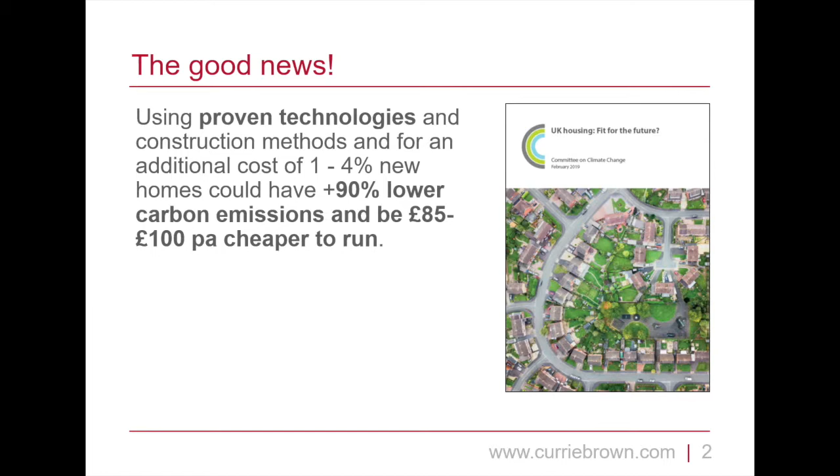Of course, there's always a but, and in this case, the but relates to the fact that although these are all proven technologies, and there are probably half a dozen examples of all of them in this room today, if we're talking about building 300,000 homes a year, which is the ambition by the mid-2020s, and changing the technologies we use to heat those homes across the board, and the way in which they're built, the sorts of technologies and methods we use for construction—although they're established, they're not mainstream.

So that transition, managing it so it's done without causing too many risks to the performance of homes, too much disruption to the industry, is a key challenge.

We did some analysis on the impact of delaying action and what happens if you were to build to current standards and then try and retrofit to higher standards in the future. What that showed us was that the costs were 7+ times higher if you try and achieve the same standards via retrofit. So new build is your big opportunity, and we really don't want to miss that opportunity.

And also, the carbon penalty that you pay is really quite substantial, and I'll come on to the analysis around that. So every year that you delay retrofitting to these higher standards, you're incurring quite a big carbon penalty, which is significant even over the 60-year life of that home.

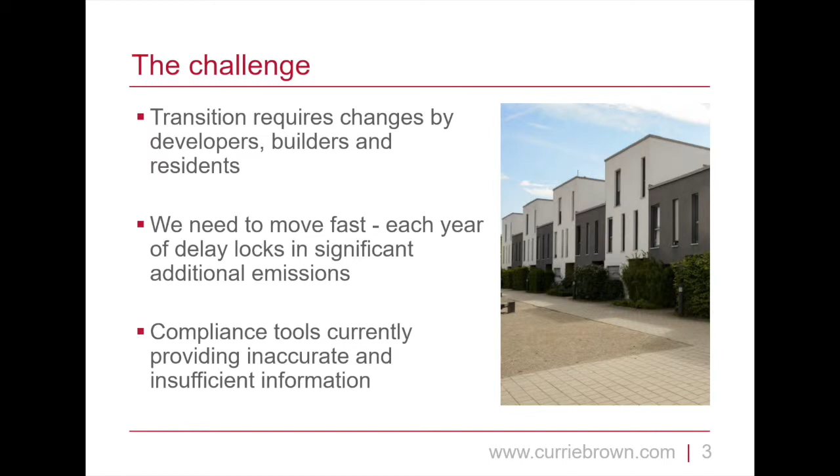I won't go too much into these points in great detail because they're things Lynn's already covered. The key thing is there's a recognition that the ambition needs to change. We've had the same building standards now for 6 years, and given the scale of expectation, that's really pretty poor, and it needs to change.

It is being reviewed this year. The Committee on Climate Change have been asked not only to look at achieving what would be required to meet our Climate Change Act obligations, 80% reduction on 1990 levels by 2050, but also whether and when we can achieve a net zero UK.

That's really important in the context of whether these standards may change, because it means the amount of investment expected from a public policy perspective - what's the value of carbon? If you're trying to get to zero, that carbon price is higher than if you're trying to get to an 80% reduction. So you can afford to spend a bit more to save that carbon if your ambition is higher and you're trying to do it more quickly.

And because of the recent publication of the IPCC report saying we need to be targeting 1.5 degrees, the government has asked the committee to look at what the UK would need to do to achieve that. So if they start to move to that sort of target, the level of investment required to reduce carbon would be higher, and the affordability of options would increase.

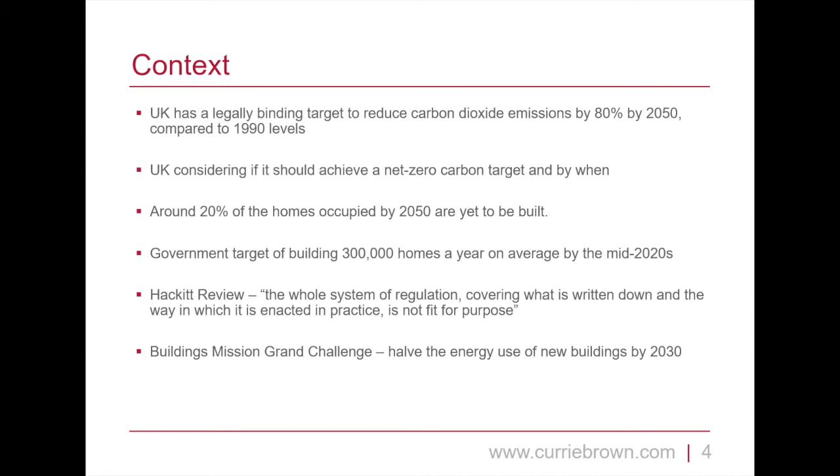So the study we undertook looked at a range of points, starting with what are the key considerations to inform regulatory requirements. When does low carbon heat become cost effective? We looked at different forms of low carbon heat, the role of energy efficiency in the mix, and what the costs are. What's the cost effectiveness from a public social perspective? Is this value for money for the UK to set these as standards that people should be obligated to achieve?

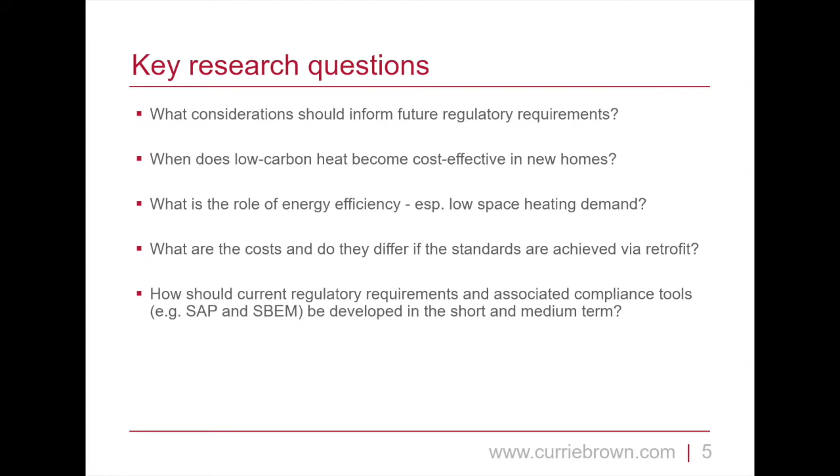And also, are the tools we use to try and achieve those standards suitable? I won't go through the analysis, but effectively we looked at a range of different building types. We assessed a whole range of different specifications and solutions by which you might achieve higher standards, focusing specifically on fabric efficiencies and low carbon heating.

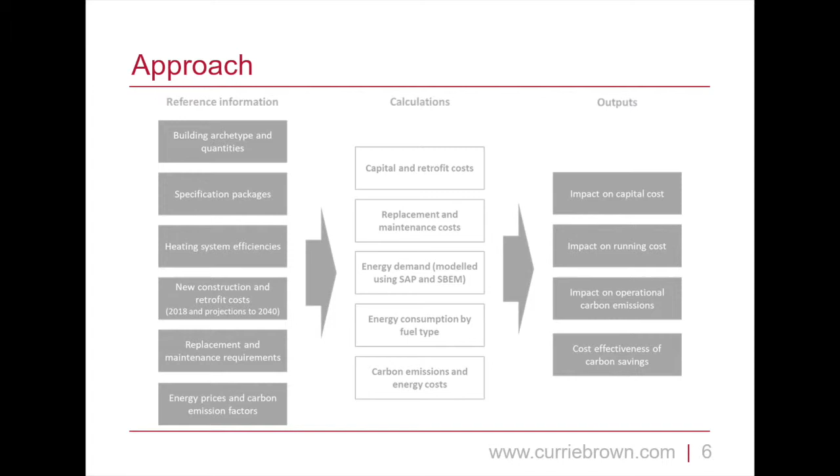We then went on to look at the capital and life cycle costs, the carbon savings, the energy savings, and the cost effectiveness - the impact on household bills, lifetime carbon emissions, and lifetime energy use. So it was a similar sort of analysis you might do for an impact assessment for building regulations, but looking at achieving very high standards of carbon reduction.

We assessed both domestic and non-domestic buildings, but I'm going to talk about the domestic side today. We looked at a range of different house types, the current building regulation standards, and then reducing space heating demand down in 5 kilowatt-hour per metre squared per year increments, down to 15 kilowatt-hours per metre squared per year.

Which many of you will know is broadly equivalent to a passive house level of performance. So if passive house level fabric is one extreme, and we're currently at the Part L notional standard, where should we go in between those points, or should we be looking to get to passive house standards, and if so, how would we go about doing that?

And then we combined those with the standard currently used, so a gas boiler. We looked at using air source heat pumps and low carbon heat networks. We explicitly didn't look at on-site renewables, so photovoltaics.

For some of the reasons Lynn mentioned, in the sense that you can't necessarily offset your heat energy consumption. If you're using gas, you can't offset that with PV, particularly as the carbon intensity of the grid is reducing over time. The amount of carbon you're offsetting through generating on site is reducing as the grid decarbonizes, but your gas stays the same. So your net carbon emissions effectively go up over time. So we didn't look explicitly at PV.

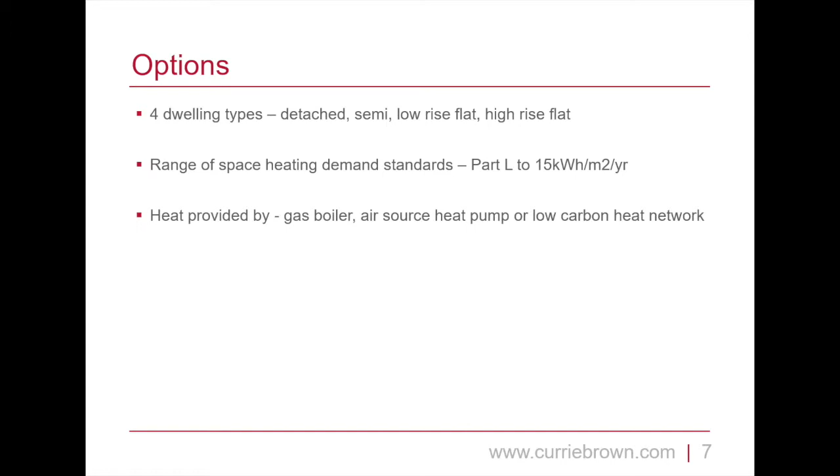So that's a quick overview of what we did, and some of the key findings we identified. No surprises here, but form factor was a key variable, and it's something that the current approach of having a notional building which sets a target based on the design of the building you're proposing to build is a big limitation.

So if you wanted to achieve an absolute performance standard, it's much easier to do that if you're building a block of flats or a terrace of houses than it is if you're building a detached house.

The fact that the regulations give you an easier target if you're building a detached house than if you're building a flat is an issue when looking at the suitability of very low carbon heat solutions, where a lot of the benefits from reduced energy demand and reduced peak demand are only applicable when you get to an absolute level of space heating, which you can't do if you're using a notional building standard.

So one of the key things we identified was that the notional building standard is a problem in trying to achieve better performance. We also identified the role of mechanical ventilation with heat recovery.

If you want to get to the higher standards, it's very difficult to do that while sticking with natural ventilation methods. We recognise there are some technical challenges with MVHR as a solution, but it's an important part of the mix of getting to these higher levels of performance, and if installed correctly and managed appropriately, it can be used and is an effective technology.

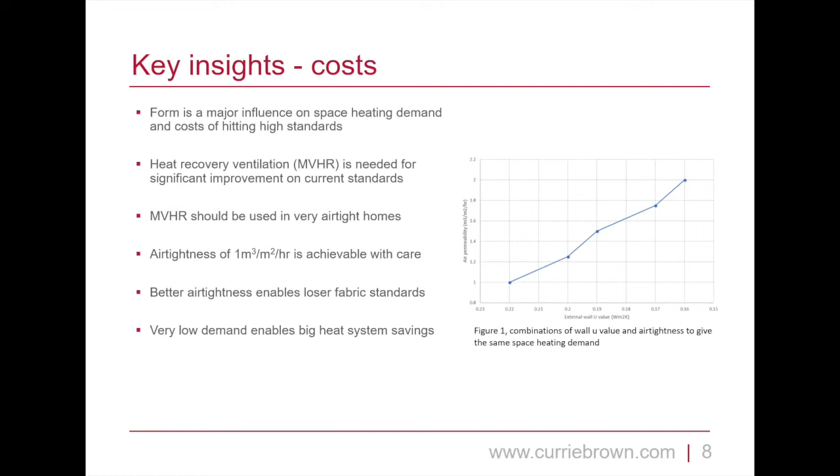So you can reduce the amount of your wet heating system, reduce the number of radiators, reduce the runs of your pipework within the home, and that starts to claw back a lot of those additional costs. So your net additional cost comes down as you get to very high levels of energy efficiency.

And there's potential to go further. You might even say, well, why do we need a wet heating system? Let's go for panel heaters. Now, we didn't look at that in detail, but that might be something that becomes an option in the future if you get very, very low space heating demand.

Certainly, we found that the cost of that higher level of energy efficiency wasn't as high as we had expected and had looked at previously. You then combine that with a low carbon heat source and you're looking at under £5,000 additional cost for a semi-detached house. For flats it's far less than that, around 1% additional cost, which given the variability of construction cost is something that gets lost in the noise, to be perfectly honest.

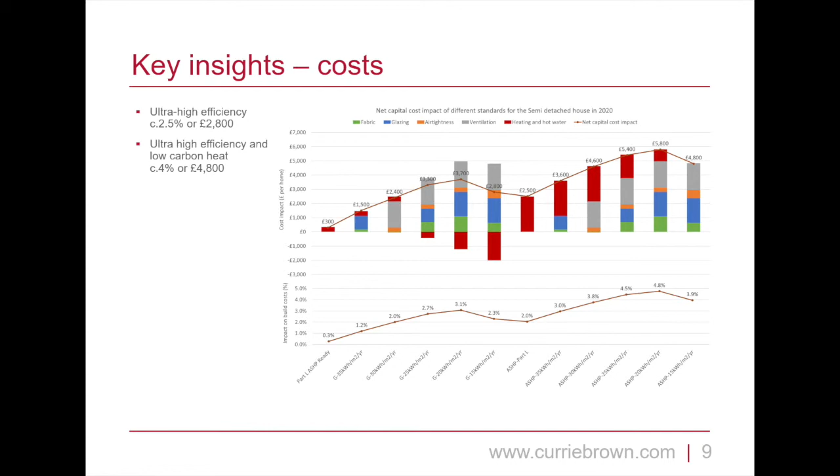So in terms of costs, we identified that the costs were probably lower than we had originally thought they would be. Looking at carbon, and this is where it comes back to the tools that we use to assess carbon.

This chart at the top shows both BEIS's and the Committee on Climate Change's projections for future carbon intensity of electricity. The two dotted lines - the top one is the SAP 2012 figure we currently use to assess electricity performance in the home, and the blue line is the SAP 10 figure. Currently SAP 10 is between the BEIS and Committee on Climate Change assumptions on carbon emissions, but if you look at the lifetime of that home, running to 2050, it's massively overstating the carbon impact of that electricity use.

So if you're able to switch to an electrical form of heating and hot water over the life of that home, you're creating a big opportunity for carbon saving. And it's not just in 2050 - by 2030, the SAP 10 prediction is double what government and the Committee on Climate Change expect the grid carbon intensity to be. So we're really overstating the carbon impact of electricity.

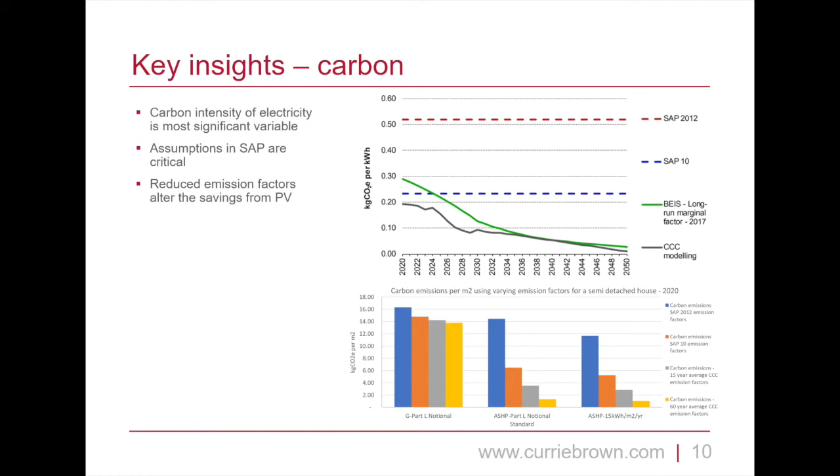If you compare different house types and specifications, the first column is for a gas home - makes very little difference in terms of performance. If you look at the heat pump options, going from the blue column, which is our SAP 12 figure, through to the future whole life carbon impact based on future carbon projections - the difference between just over 14 kilos of carbon per metre squared to under 2 kilos of carbon per metre squared - it's night and day. So the tools we're using are not giving us good information about the whole life impact.

This analysis looked at the cumulative carbon impact of using a traditional gas boiler at the Part L notional specification, keeping a gas boiler while building close to passive house standard, compared to using an air source heat pump at the notional specification, and an air source heat pump at the passive house standard. It told us some really interesting things.

The blue line shows cumulative carbon emissions of a home with a gas boiler built to Part L. If you build that to a passive house style spec, the light blue line shows you're saving about 40% of carbon emissions over 60 years. However, if you use an air source heat pump from day one and still build to the Part L specification - so no energy efficiency - your actual carbon savings over 60 years is over 90%, far higher than the energy efficiency approach.

This just shows the importance of getting to low carbon heat, and importantly hot water rather than necessarily the heat. If you go to a passive house spec, you actually save only maybe a couple of percent more in overall carbon savings over 60 years, because the electricity is so low carbon for most of the life of the home. This doesn't mean you shouldn't do it, but it shows there's very little additional carbon benefit from going to a passive house spec over a Part L notional spec.

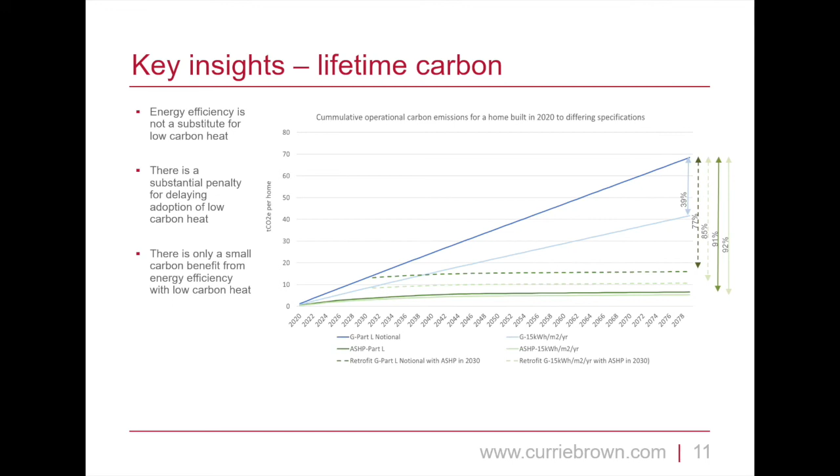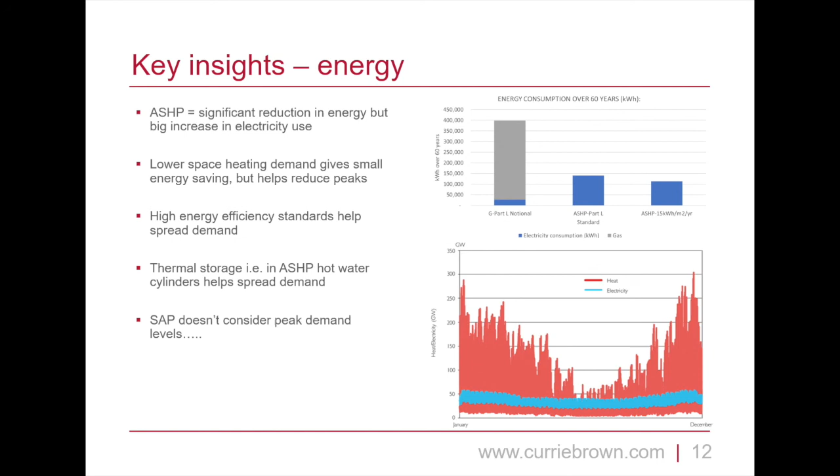I'll stop now - just wanted to quickly mention that although the carbon benefit from building to passive house standard is small, our recommendation is it should still be done, because you save significant utility bills, and it has a big impact on reducing peak demand for energy. The wider energy system can operate much more efficiently if you have a very energy efficient home which can trickle heat throughout the day, rather than having peaks in demand at certain times which put unnecessary additional strain and cost on the infrastructure. Okay, thanks.